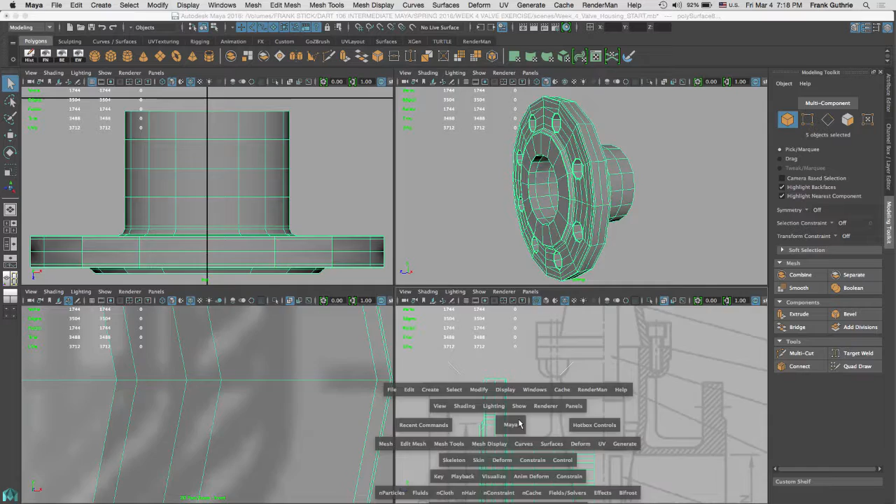Alright, so we have the flange finished. So what I'm going to do next, I'm going to build the housing. If I go to my side view right here, let me get out of X-ray mode. And here's our housing. This is the shape of the housing. Housing is a very interesting shape. It has a rectangular cube on the top, as you can see right here.

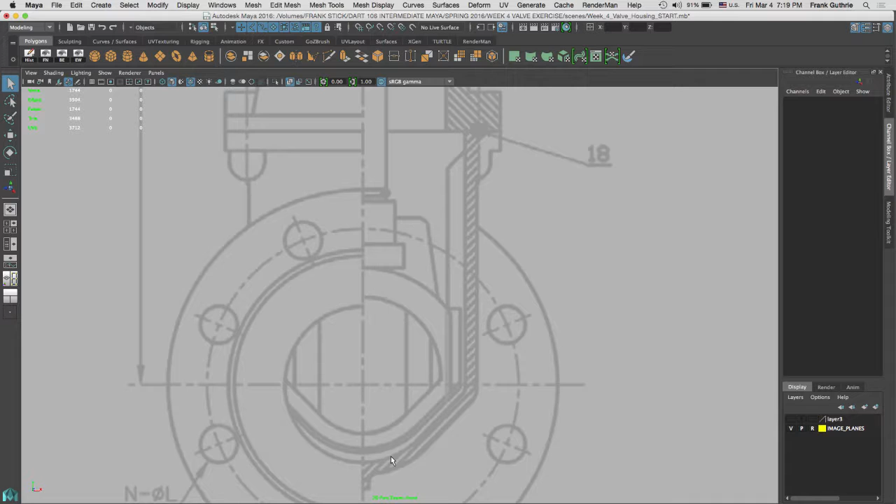But as we go down to the axis of our flange, notice that in the front view it looks like a rectangle, but here we're going to have a double taper. It's going to be a rectangle sideways, but then when we get to this point right here, it's going to taper. So the best way to attack this shape right here is I'm going to create a cube.

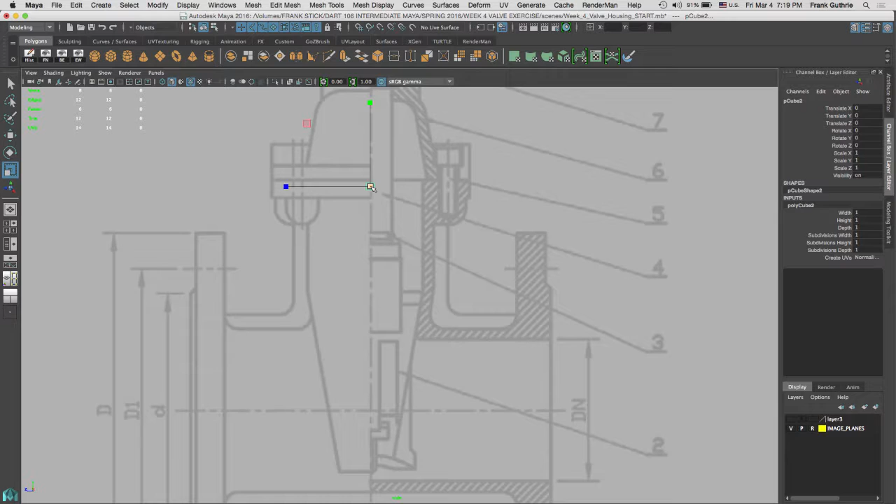I'm going to hit R for scale, and I'm going to scale it so it matches the width on the side view. I'm going to lower my box down to this point right here. That's where it starts tapering towards the bottom. I don't care about the top because I'm going to cut it. And I'm going to go to my front view. I'm going to select the bottom face. Even though these guys are selected, I'm going to hold the control key and deselect the top.

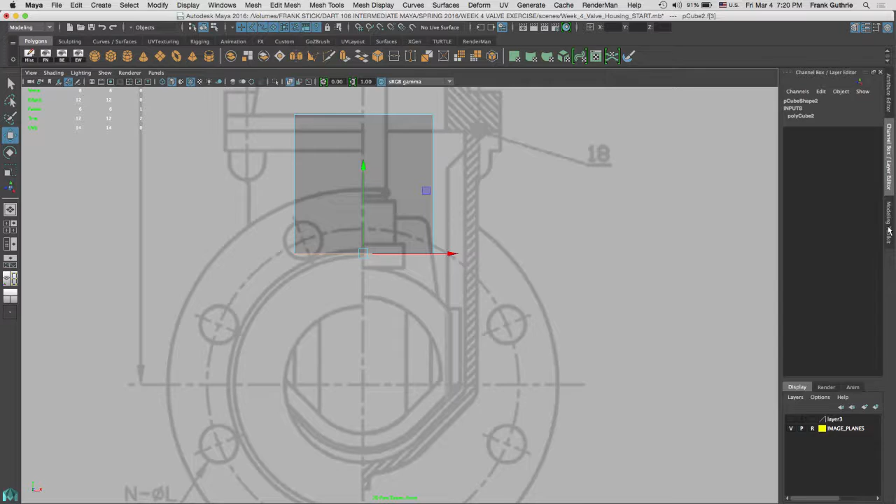And I'm going to use my modeling toolkit. I'm going to go to extrude. And I'm going to move this guy down here. I'm not worried about the width yet. I'm going to change the width later. I just want to get the height from the side view, as you can see right here.

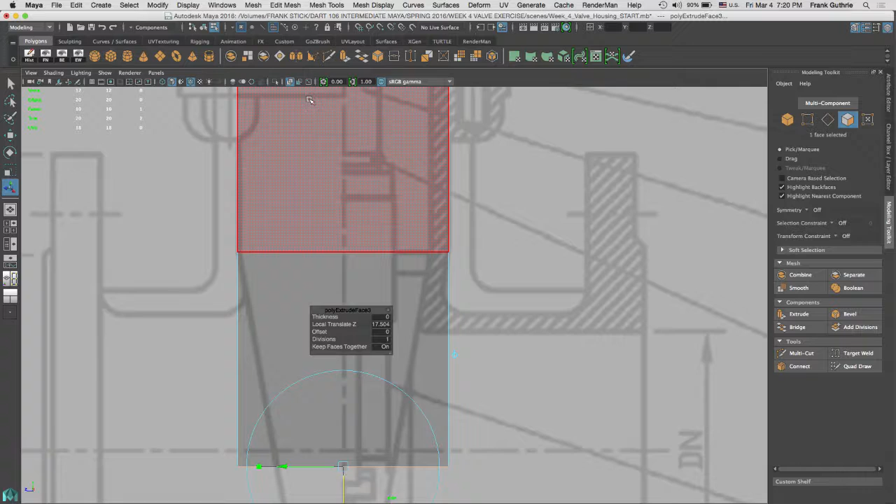Let me go to X-ray, which is this button right here, to the right of the isolate selected. And I'm going to do that one more time so I can get the bottom of the casing. So I'm going to hit G to repeat last operation, and I'm going to drop it right here. Okay, now I can select my scale. I can go to the front view, and I'm going to hit R for scale and expand it.

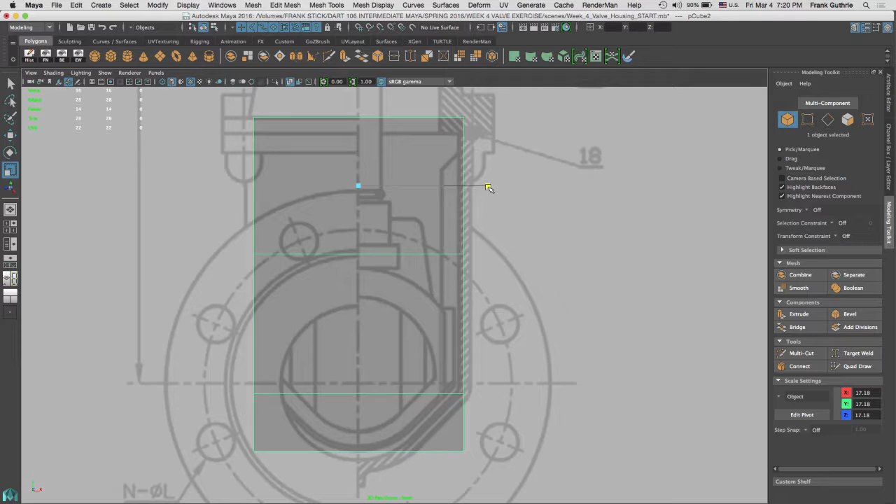So notice that we're going to get this part here to taper and to meet our flange, right? So I can do that right now. I can select the vertices of this box and scale them until it meets the shaft. All right, let me go to my 3/4 view, and look at that. It's right there. I'm going to take advantage of this edge right here. Okay.

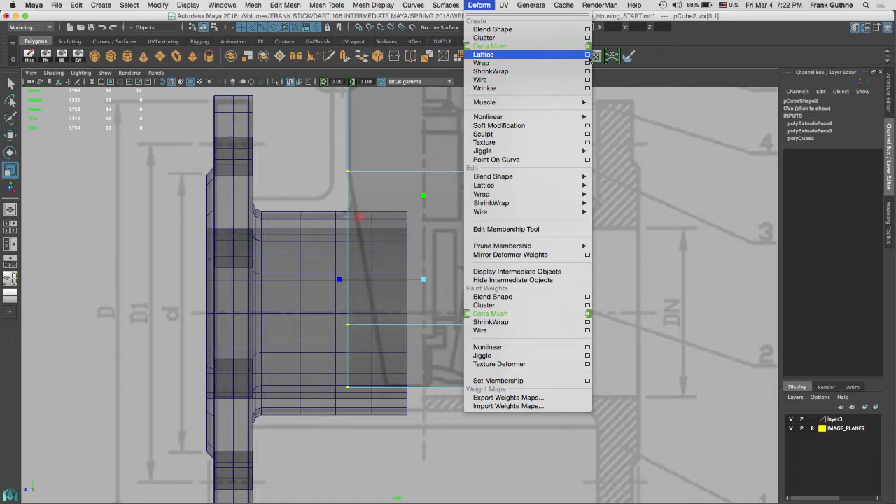So I'm going to fix the side taper. And to do this, I'm going to use a lattice. The lattice will be under Deform, Lattice. I'm going to reset it, make sure that everything is set to 2. I'm going to hit create. And I'm going to deform the vertices that I had selected. So now what I need to do, I need to go to component mode, and selecting the component mode of a lattice is kind of tricky.

All right. So the best thing to do is to go to the 3/4 view. Okay. So I'm going to select the bottom 4, these guys right here. And on my side panel, I'm going to taper both sections right here. So this one and this one. So again, it looks like a rectangle all the way down to the middle of our shaft. But if I go to the side, notice that it tapers all the way to the bottom.

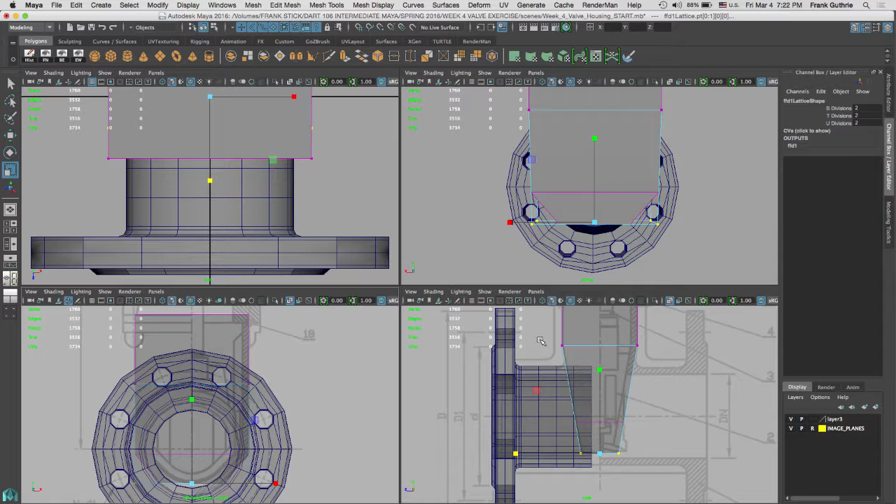So to get rid of the lattice, I'm going to go right mouse button, select my object, and I'm going to delete the history. That's how you get rid of the lattice. And let me delete half of this. In object mode, I'm going to use the multicut tool. And I really don't care to hit the middle 100%. Again, that is because I'm gonna snap it.

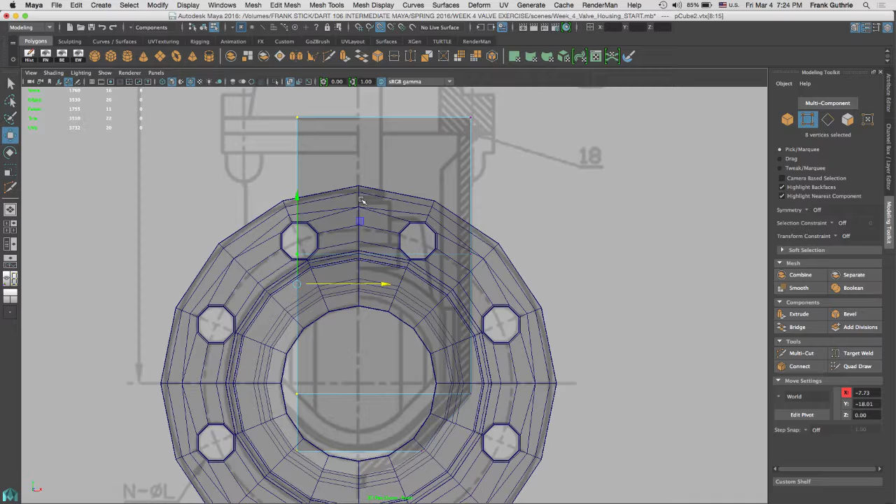So I'm gonna select these vertices right here, move tool, I'm gonna drag it, and then I'm gonna hold V for point, and then I'm gonna middle mouse drag to a place that I know there is a point. It doesn't have to be from the same geometry. It can be any other geometry. So I'm gonna use the flange. So I'm gonna go V, middle mouse drag, right there. Okay, so I have half of my piece. Let me go to object mode.

Now, let me fix this edge right here so that it matches this edge right here, right? We're going to take advantage of that. So I'm going to select this face. I'm going to move it up, and I'm going to do the snap to point trick. Hold V, and then middle drag it to this point. And now I'm going to select this edge like this, and I'm going to move it in the X axis, and then I'm going to hold V and snap it to this point right here.

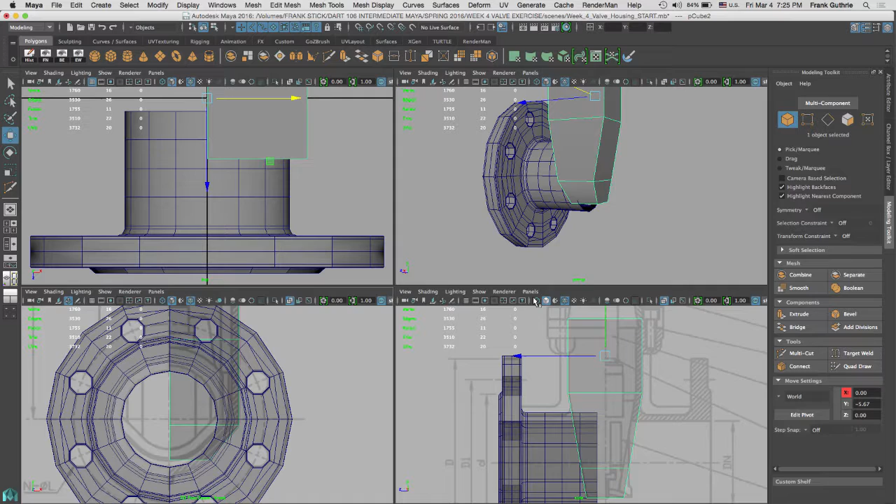All right, so now these two edges are in the same place. I'm gonna go to object mode, right mouse button, select my shape. I'm gonna double check, make sure that it fits my image planes. These look really good. And this half looks really good and matches the drawing. Notice that it goes right here and it's gonna melt with the shaft.

So again, select all the edges, and we're gonna go to bevel, and let's control our bevel thickness by moving our fraction. So I'm gonna make a smaller fraction like this. I don't wanna get too complicated, especially in this corner right here, because I'm gonna have to merge these edges, and I'm gonna give it a couple of segments, 1 and 2, okay? And I'm gonna make my fraction a little bit bigger, like so.

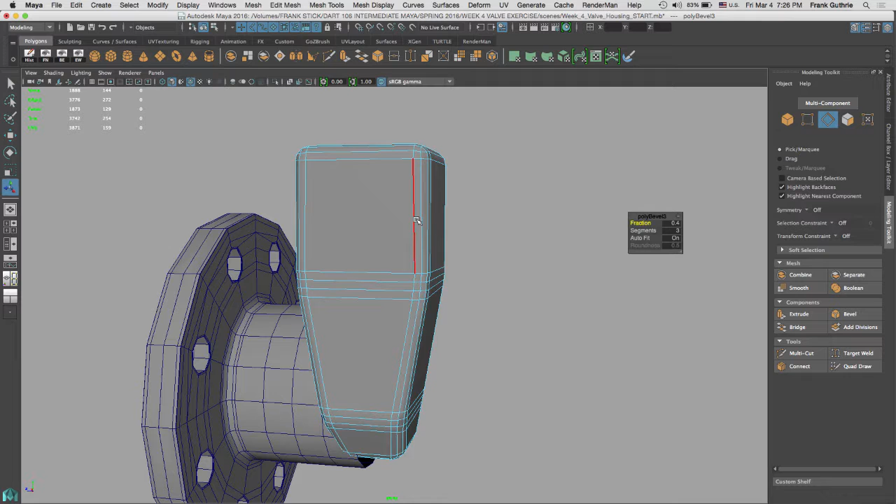All right, I'm not gonna delete the history, so I'm gonna go to object mode. I'm gonna get rid of my wireframe on shaded, and I'm gonna see if I like this bevel or not. I'm gonna look at my reference to see if this bevel is close to our reference images. Let me select these edges right here. And when you select these edges, we can soften our edges. You will notice that some of these edges are sharp, like for example right here, versus these edges right here.

So all you gotta do is select the edges, and we're gonna go shift, right mouse button, and we're gonna go to soften, harden edges, and I'm gonna select soften edges, and there you have it. Look at the difference right here. Now all our edges are softened.

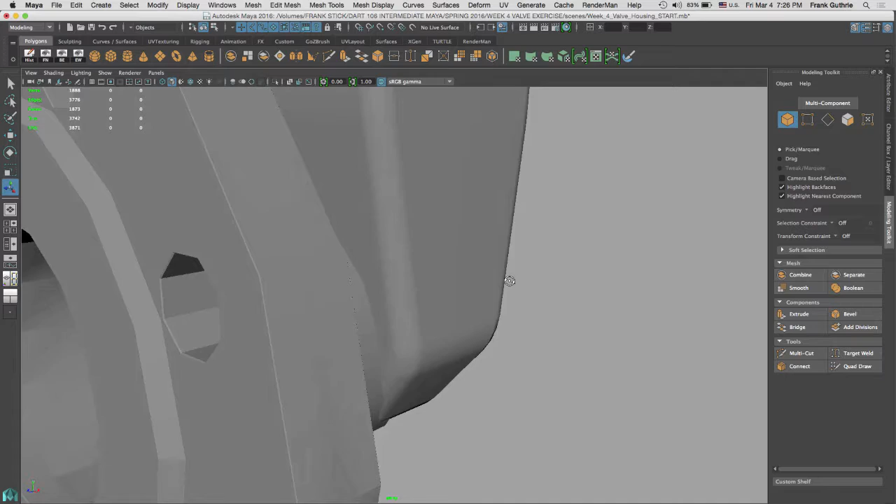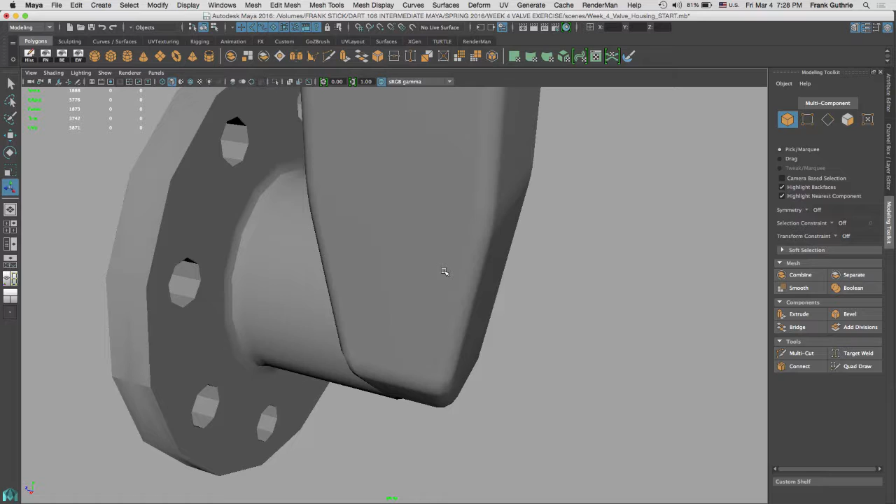Now I've noticed in my reference, here is our reference. I'm gonna zoom in and I'm gonna look at the bevel that I have right here, and I'm gonna compare it to the one that I have in Maya. All right, I'm gonna try to pose this valve and compare it to the one that I have. And that looks pretty decent. I think I got the right bevel width. Perfect.

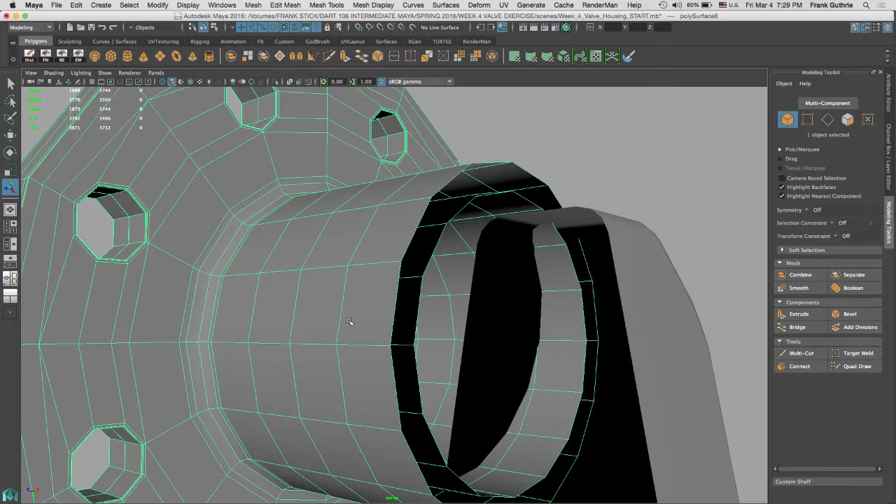All right, so what we need to do now is we need to combine these two shapes. And as you notice right here, I have all sorts of geometry and all sorts of edges going everywhere. Now, the rule is that we do not want to alter these planes. I want to keep these planes the way they are, because when I hit 3, I'm going to get a smoothness that is going to propagate to this flange right here. Now, look what happens if we add edges in this direction, going along with these edges right here.

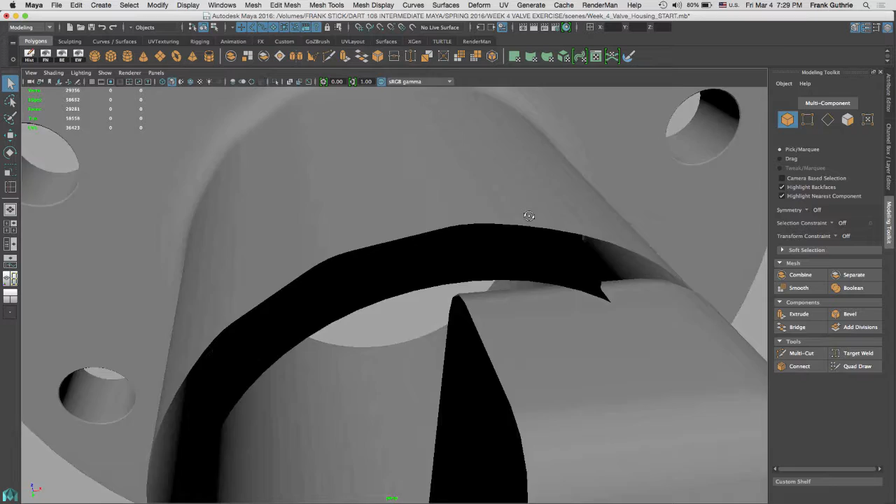If I select this, for example, and I go shift, right mouse button, insert edge loop tool, and I start putting a bunch of edges right here. When I hit 3 for smooth preview, notice that our planes will flatten. And that is because we are actually creating a fencing, just like what we did for the edges. So we don't want to put extra edges going in this direction. However, we can put as many edges as we want going in this direction right here.

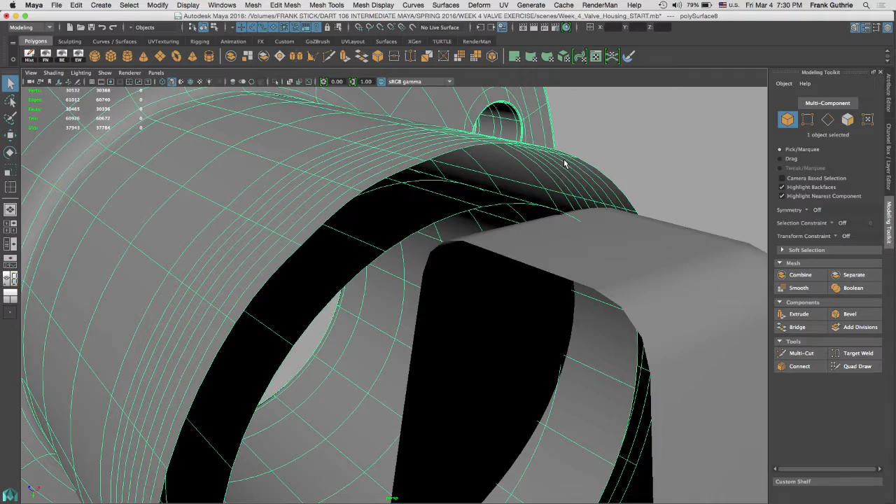Let me undo a couple of times. And let me apply the insert edge loop tool to this direction, and you will notice that nothing will happen. We will not get any flattening whatsoever. Okay, so I overdid it. I put a bunch of edges just to prove my point, and I'm going to hit 3. I think this edge right here is extra. I'm not sure. Yeah, because this doesn't look right at all.

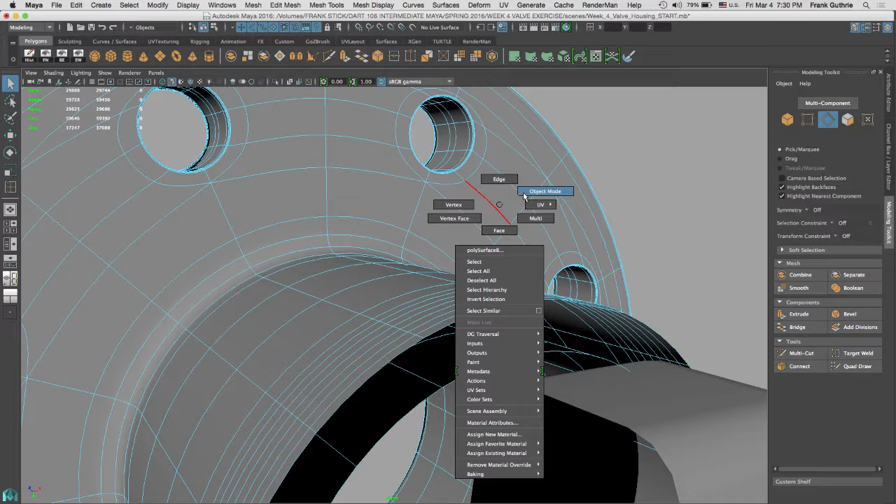With the Q, which is the selection tool, I'm going to double click this edge, shift right mouse button, delete edges. Do not hit delete, because you will leave a bunch of little orphan vertices. So notice when I hit 3 that the shaft is perfectly smooth. However, we have a bunch of edges right here, and they do not alter the smoothness of our planes. They will do it going in this direction, but not in this direction.

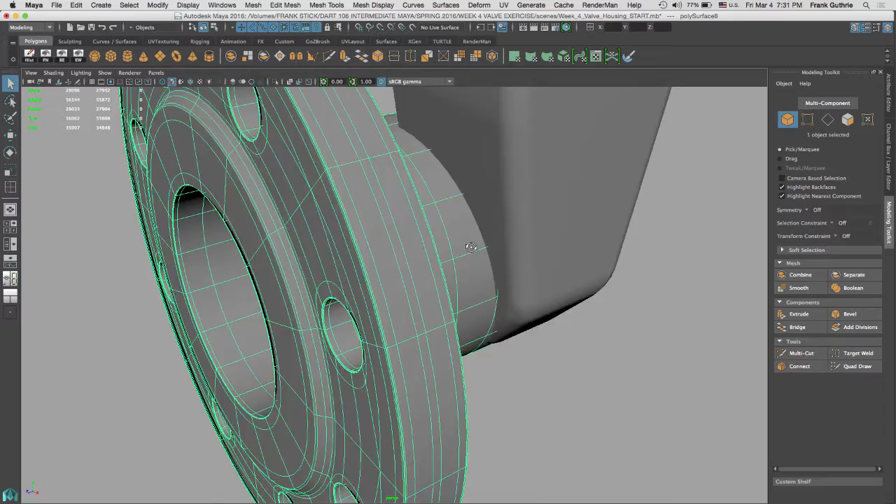And let's talk about combining these two pieces. So the plan of attack is as follows. I'm going to turn on my wireframe on shaded. Now this is fine. I can extend an edge right here. I can also extend an edge going in this direction, and I can extend an edge going in this direction. These guys right here are going to be what I weld.

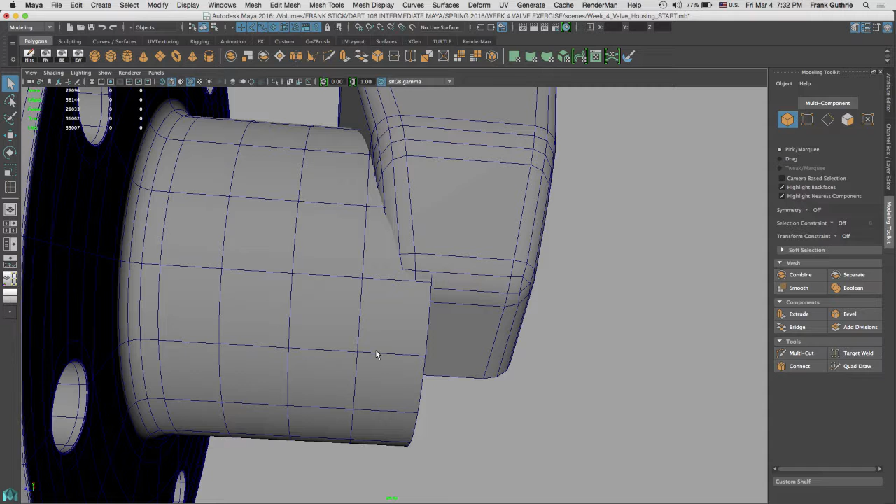And I'm going to cut this in half because we don't need to work on this half. Remember, we're going to work on a quarter. And what I can do is I can continue these edges all the way down this way right here. Okay, let's do this. I'm going to select this object, and a really fast way of cutting this object in half is pretty much just going to your side view. I'm going to select these faces, delete them. I don't need these.

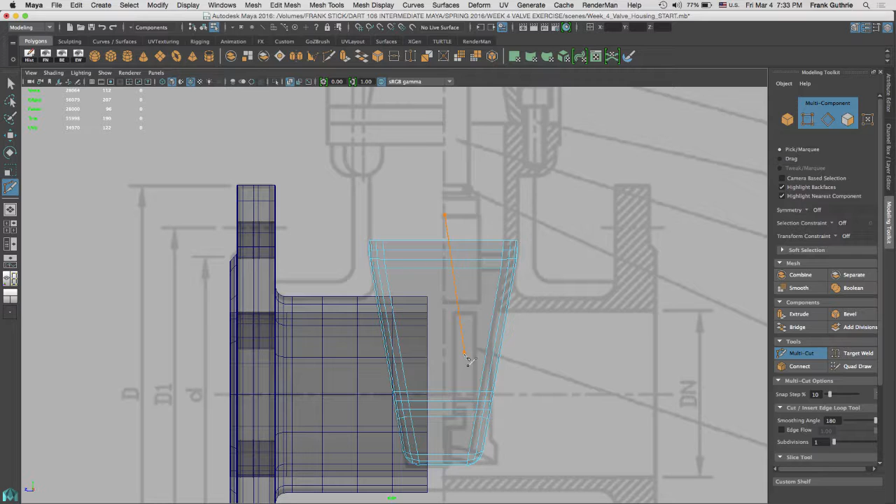And I'm gonna select this object, select my multi-cut tool, and then click outside of the object, hold shift so you can get a straight line, and then drag it past the object, and it will do a clean cut. I'm gonna select these faces, delete. Excellent. All right, so let's start combining these two pieces.

The very first thing that I'm gonna do is I'm gonna get rid of these edge loops on the flange. I'm gonna double click on this edge, and I'm gonna go shift right mouse button, delete edges. Let me go to 1, double click on this edge right here, hit G. G stands for repeat last operation, and the last operation was delete edges. So double click here, G, double click in the inside of the shaft, G, double click here, G, and double click here, G.

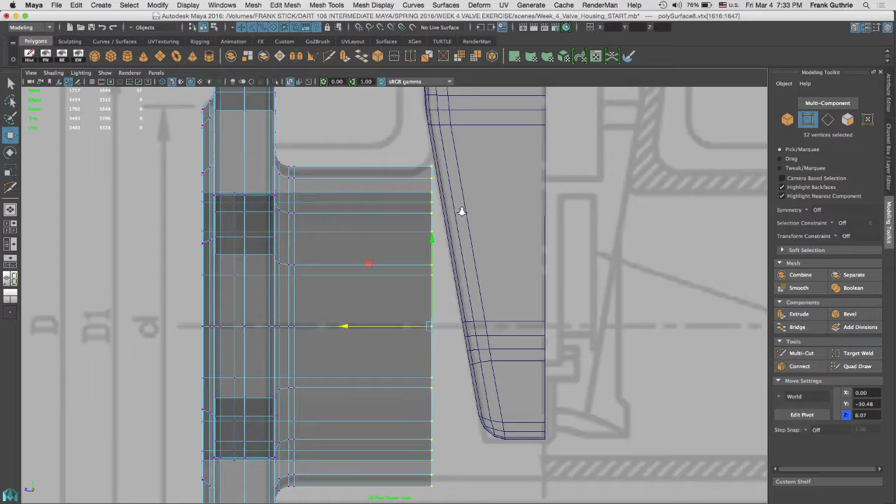Okay, so we wanna move these vertices right here to the point that they lay right flat on this face of our housing unit. So the best thing to do this will be to use, again, our lattice. I'm going to correct this edge right here. I'm not really thrilled with this edge. Now, I cannot use my vertex snap with the V key to this right here because it's going to alter my volume. However, I can use our friend the multi-cut tool, and I can clean these edges right here. So I can do this, and then do another one right here, and then do another one right here. I'm putting it next to the other ones because the other ones are all crooked, all right? And I'd rather have these very straight.

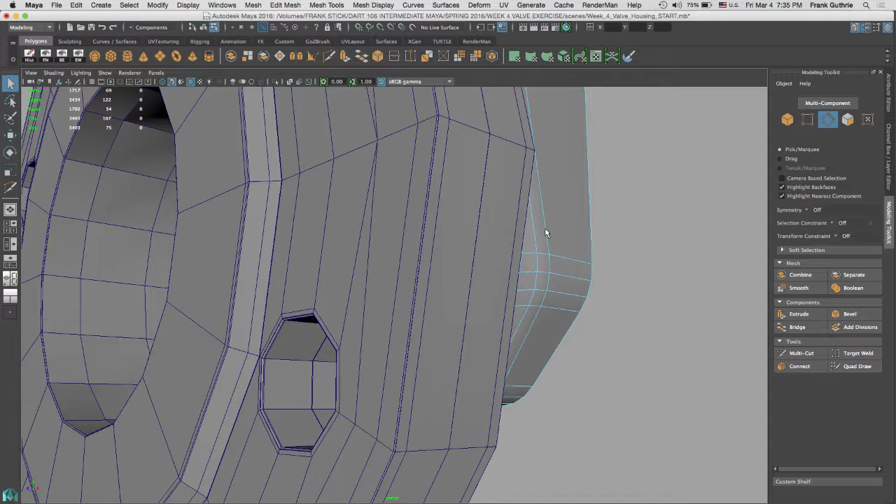So hit Q, double click on this edge right here. All right. Shift, double click this one. Shift, double click this one, shift, double click this one, and then shift, right mouse button, delete edges. And notice that we have not altered this corner, okay? However, these lines are straight. Let me go and hide the flange real quick. I just want to see these vertices right here, either giving me a problem or not.

Now, notice that I'm not getting a really nice curve on my bevel. That is because it was a very odd shape to bevel, right? So I'm going to eyeball this. I'm going to move these vertices right here so I can follow this curve. Okay. And let me select these guys and move them in. Okay, there's an issue right here. I have a triangle, but this doesn't matter because this piece is going to be deleted. All these faces right here are going to be deleted because our shaft is going to connect right here.

Okay, so I'm going to go to the front, and this edge right here will meet this edge of the flange. So I can select these faces, delete them. I'm going to select all of these guys right here, delete them. And I'm going to move this edge so that it matches this corner. Now, one way that we can do this is that we can select vertices. And what I'm going to do is I'm going to put the pivot point for all these vertices right on this one right here. So I'm going to hit D, V, middle mouse button, drag it, and then hit D again. And I'm using the move tool, so I want to make sure that the spacing is kept.

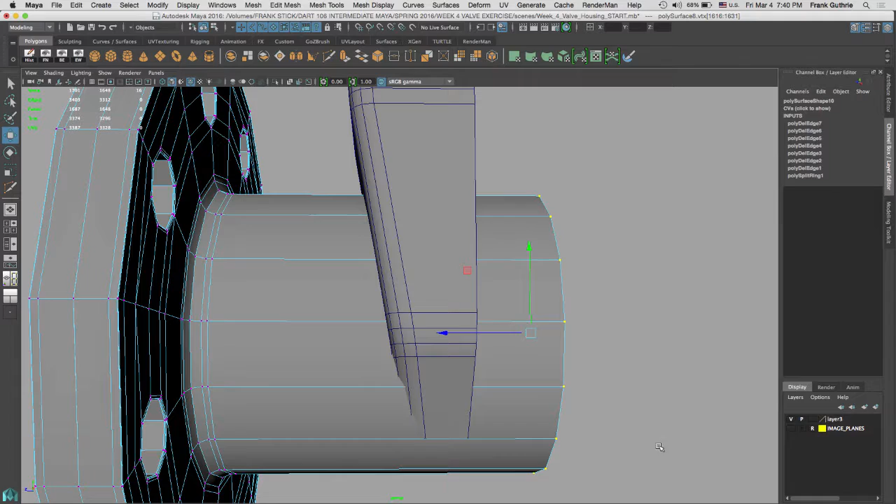Okay, so the way that I'm going to do this, I'm going to select my vertices, and I'm going to use the lattice again. So I'm going to click on the lattice. All right, so now I'm going to go to right mouse button, lattice points, and I'm going to move this guy right here. I'm going to go to my side view, hit F to find those points, and I'm going to zoom in as much as I can.

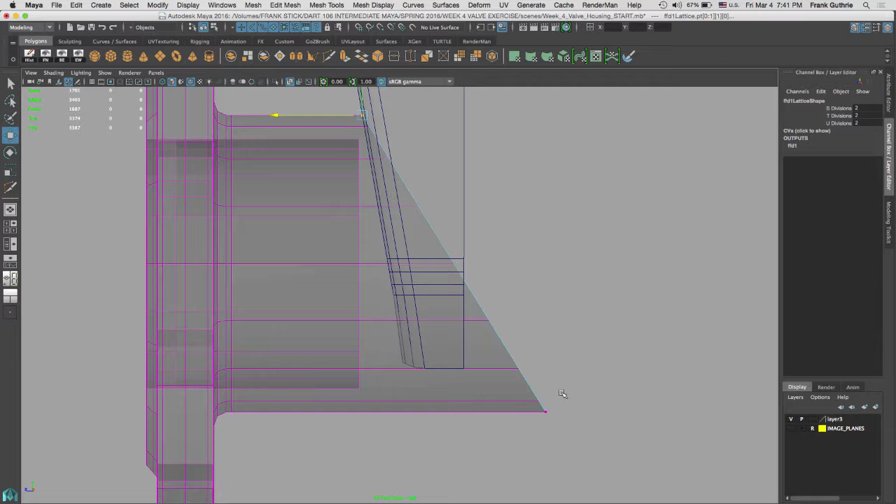Again, all the way down to a subatomic level. Right there. I'm going to hit F again. Now, there's a really cool trick in Maya. As soon as I move this right here, okay, if I want to align it to, let's say, this point right here, what I'm going to do is make a movement in the direction that I want this to move. So in this case, it's going to be on the Z axis. And then I'm going to zoom in as much as I can to this edge.

And with my middle mouse button, I don't have to grab the handle anymore, because the middle mouse button is going to allow me to repeat the last transformation. So this works really good with the scale tool and the move tool and the rotate tool. So again, you make one movement, right? And then you can be anywhere around here. Move your camera, zoom in, and then use the middle mouse button to repeat this operation, right? I can go right here, middle mouse button, undo. Perfect. Okay, so I have this aligned correctly.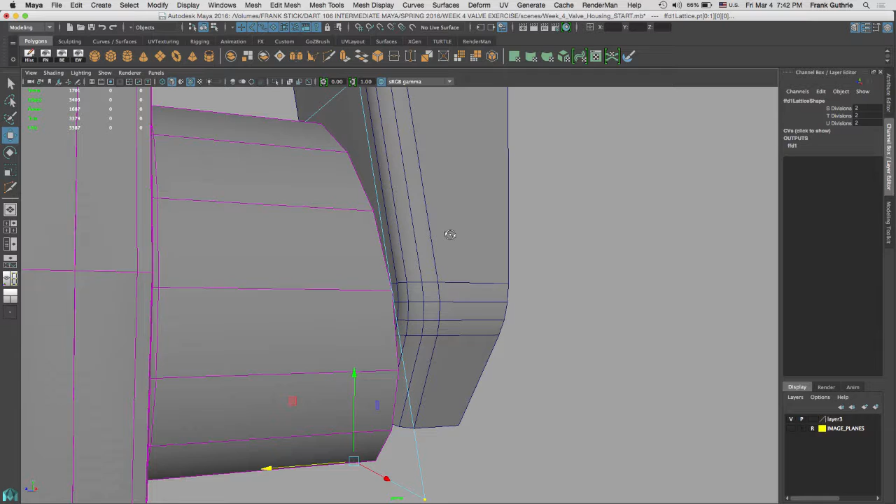I'm also noticing that this piece right here has expanded. All right, that is due to the beveling operation. So again, let's get rid of this lattice by selecting this object and deleting the history. And I'm going to do the same thing with these vertices right here. I'm going to select this object, vertex, select these guys, go to deform lattice, and now I'm going to go right mouse button, lattice point.

And what I want to do is move the bottom ones like so, but only this group right here, only this side. So I'm going to do a movement. I'm going to zoom in as much as I can, and then I'm going to use my middle mouse button right there. Perfect. Okay, select this object, delete history, and as you can see, let me go to the 3/4 view so you can see it. Our lattice will disappear.

Okay, and what I'm going to do next is create an extrusion out of this edge on the flange. Out of this edge, I'm going to extrude this edge in such a way that it goes along with this plane right here, and we're going to use the scale tool trick, and then I'm going to combine that edge with this piece right here, so I can use this edge again to create a bevel. Okay, so if we go back to Photoshop and look at our references, pretty much what we're doing, we're creating this connection right here. Notice that this box will merge right here, but here we have a bevel. Okay, so let's do that real quick.

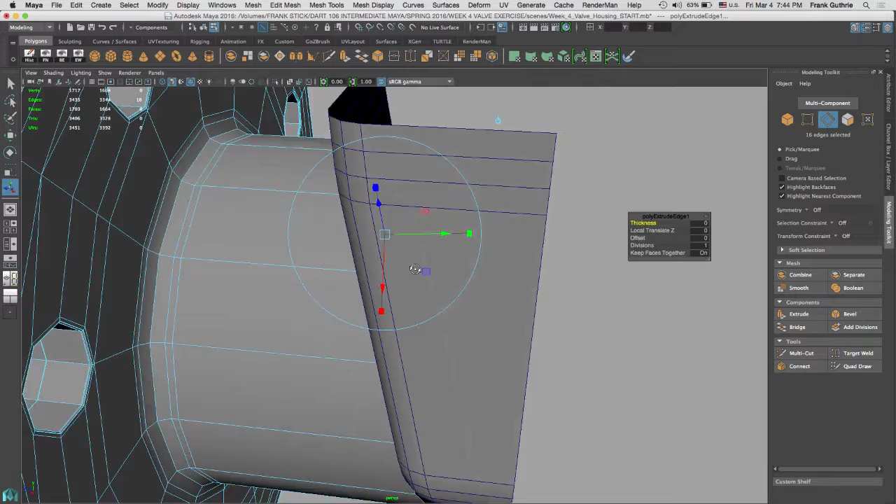I'm going to select this edge, and I'm going to go shift right mouse button, extrude edges, or I can use my modeling toolkit and do an extrusion. So if I was to use the default local translate Z, remember every time you make an extrusion, Maya uses the Z movement, okay? And it doesn't have to be in the Z axis, but your gizmo will have an X, Y, and Z transform, and you will see it right here in the polyExtrude gizmo. So if I go translate Z, notice that my extrusion is not going along this plane.

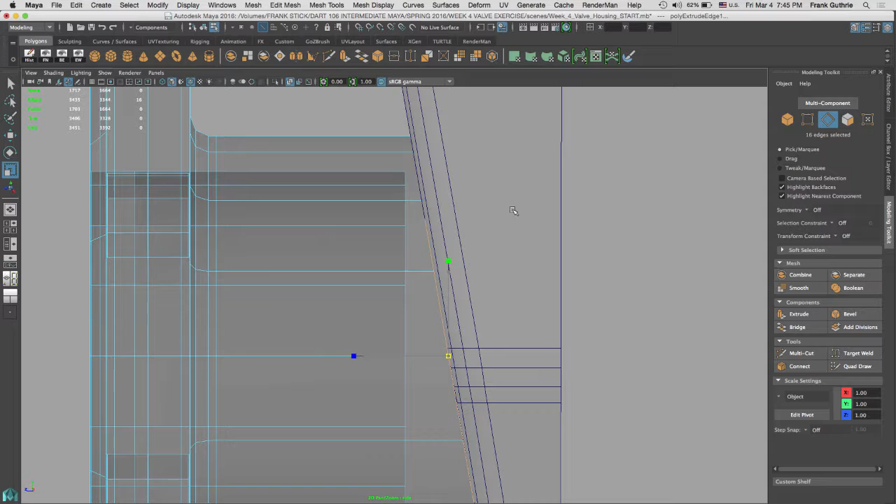What we have to do for that, undo, and we know that we just made an extrusion, so there is an edge loop on top of an edge loop. I'm going to hit R for the scale tool, and I'm going to do a global scale from the middle. Okay, and when I do that, notice that our edge is going along with that plane. If I go to my side, you can see that. And again, I just made that transformation, so I'm going to keep doing it with my middle mouse button. And as you can see, that edge is riding on this face. This is exactly what we wanted.

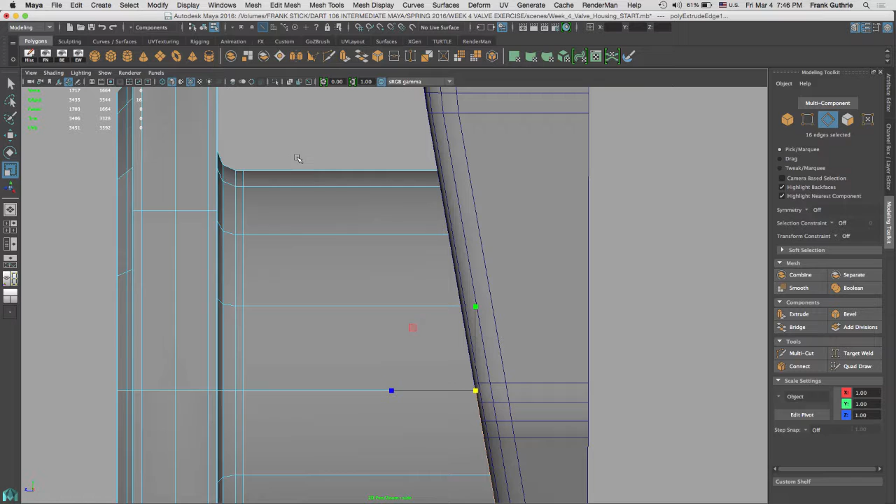Now, the next thing that we need to do is support these edges just like what we have right here. So for that, let me get out of X-ray mode so this is more obvious. We are going to use our insert edge loop tool.

So I'm going to right mouse button edge, select one of my edges with the selection tool. Then I'll go shift right mouse button, insert edge loop tool, and go to the options. Here are the options, because I want to reset this tool, and we're going to select multiple edge loops.

When I select multiple edge loops, as long as you have use equal multiplier on, the tool is going to insert edge loops and space them depending on the number of edge loops selected. So if I have 2 and click right here, notice I cannot go left and right like we can under relative distance from edge, but it gives us evenly spaced edge loops, and that's exactly what we want.

I want evenly spaced edge loops, but instead of 2, let me undo, and type in 3, hit enter, and this is what you get. The reason I picked 3 is because I know I'm going to get a middle edge loop. Once we build the edge for the right hand side so it matches the same distance as this, we reinforce it, and I'm going to get rid of this edge loop here and here.

So let me show you the standard way of using the edge loop tool, which is this one right here, relative distance. This allows us to create an edge loop and move it left and right like this. Let me move this one a little bit closer. It takes into consideration the distance of these edges based on the sliding procedure, or based on the multiple edge loops with the use equal multiplier.

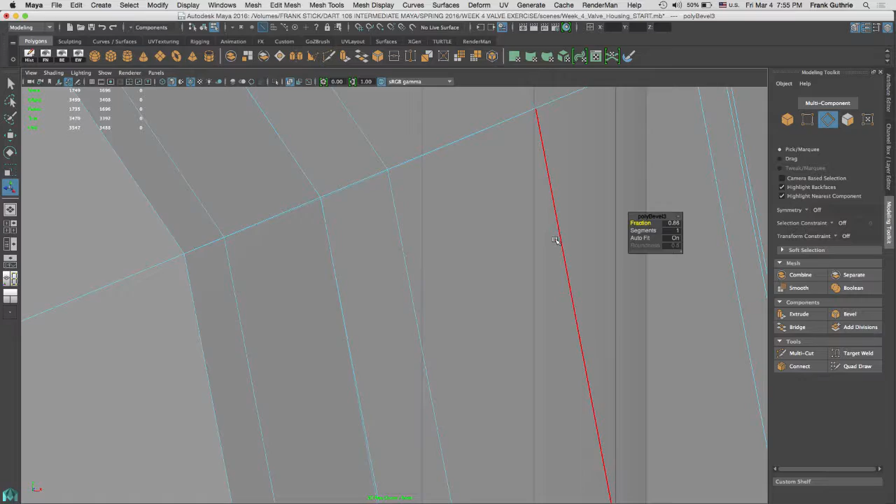So I'm not going to delete the history, I'm going to stay here, and we need another segment, so I'll increase my segments to 2. Boom, there you have it. Now this bevel here and this bevel here match, and I'm not too worried about this because I am going to blend these 2 guys together.

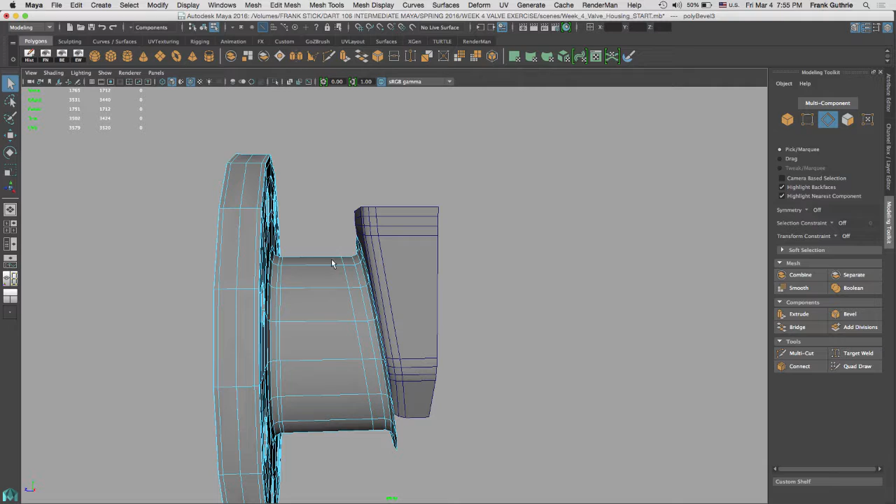And I'm going to start by now hitting Q, cutting this piece from the flange, and I'm going to hide the flange so we can work in this direction without having the flange impeding our visibility.

First, let me double click on this edge and move it to this side right here. We want to make sure that the distance is the same as on the opposite side.

Now I'm going to select with Q one of my edges, shift right mouse button, and build some support. Insert edge loop tool, options, use equal multiplier, multiple edge loops, type 3, close this, and just click once. Perfect.

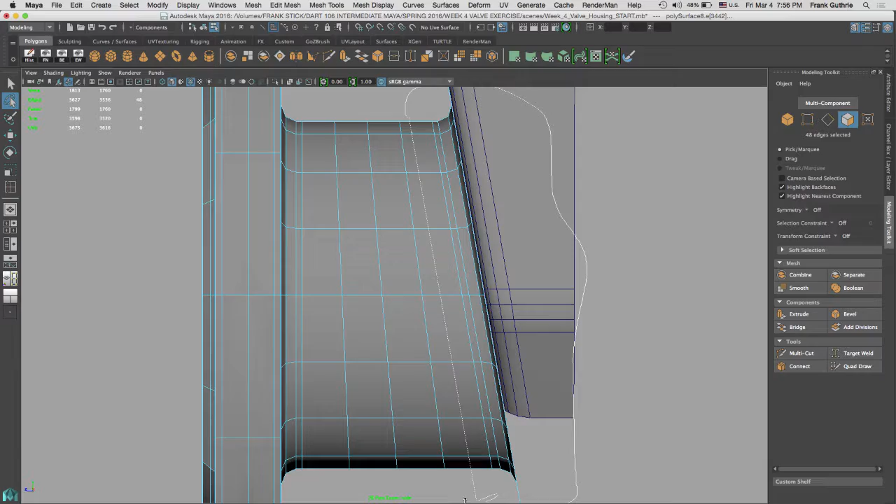I'm going to cut everything from here using the lasso. I'm going to go to my faces and select all these faces right here. Let me double check in my 3/4 view perspective camera.

Now we're going to go to Edit Mesh, Extract, and Maya is going to create 2 pieces of geometry. I'll right mouse button, select both pieces right here, and delete my history.

If I go to my outliner, notice that this is part of this group right here, and because I have it on the layer, if I close the layer to hide the front of the flange, it's going to also hide the newly created part. So what we need to do is go to the outliner, hit F, find the newly created piece, which is this one, middle mouse drag it out, and now notice what happens when I close the visibility of this layer. Fantastic.

All right, so let's delete half of this. We don't need to work with this half, and let's start combining these 2 pieces together.

Number one, I'm going to go to my front view right here. Actually, let me close — there we go. Right mouse button, edge, shift right mouse button, insert edge loop tool, options, and let's reset this tool. Perfect. I'm going to manually insert an edge loop right there.

I notice that I'm going to have a quad once I delete this part right here. And we want another one that goes from here to the top, so I'm going to click on this edge right there, and that will make a quad out of this. Once I cut this guy, I will have a quad right here.

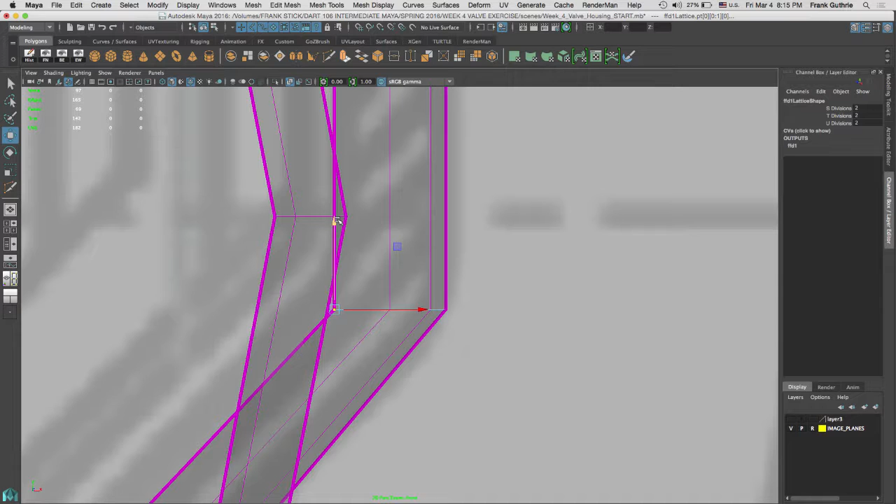What I'm going to do is select these guys right here and use the move tool. This way I won't lose my edges, because before when I was rotating it, notice that the edge was shrinking, right? So let's do it again.

Let's move this up right here, and I'm just going to eyeball it. You cannot see that on the screen, but I'm using a piece of paper on top of my computer screen, and I'm going from this point right here, putting the other part of the paper right here so I can create a visual line.

And then I can move this guy down, right there, perfect. So again, select the object, delete the history, and there goes the lattice.

Now all I have to do is select this vertex right here, move it up, hold V, snap it to that point, move it now in this direction, hold V, perfect. I'm going to leave this guy the way it is. I know I have a triangle right here, it's not a big deal. I'm going to modify this edge.

Let's take a look at what we have right here. Fantastic. Now something happened right here. I'm going to go to my side view and see what's going on. And as you can see, these edges got shrunken in.

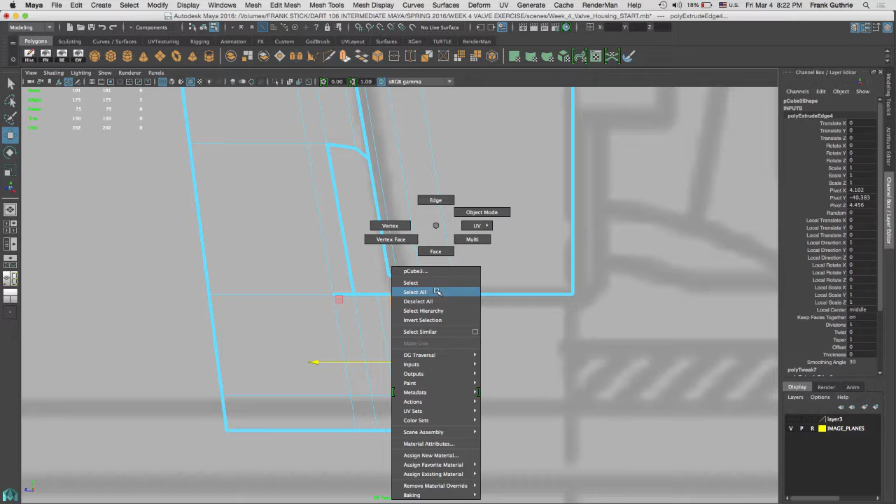However, I'm going to select these vertices right here, these guys right here, because these guys have to be straight with this line right here. This is where this piece is beginning to blend in.

So I'm going to do a W, left mouse button, deselect, keep spacing. When I move this in this direction and hold V and middle mouse button right here, now they're aligned in the X axis.

So now I have to align it in the Y axis. Move, V, middle mouse button, and there you have it.

Now remember I did this extrusion right here, this edge. So I'm going to select this edge, shift select this edge, W, keep the spacing, move it out of the way so I can select this vertex right here as my new pivot point.

So D, V, middle mouse button right here, D. Now move it and snap it to this point.

Excellent, so I'll be able to select these two guys, weld them, fill this hole by extruding edges and connecting them together, and then scaling everything.

All right, so we can follow that edge right there, this edge right here. Okay, so let's do that.

Let me select this edge right here, and let's do the modeling toolkit, extrude, W. Just quick and dirty.

Now I'm going to use a new tool, called the target weld. The way the target weld works is you select one of your points. Let me get rid of the bevel. Make sure that you select vertices, and you're going to go from here to here.

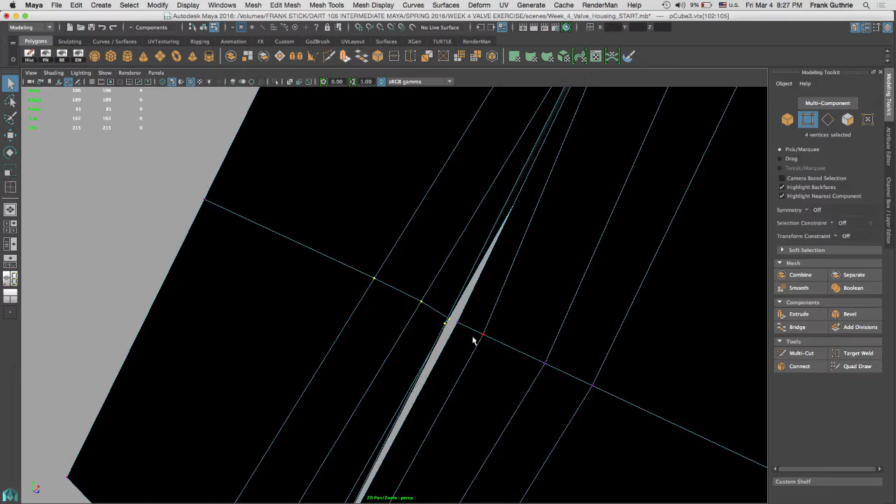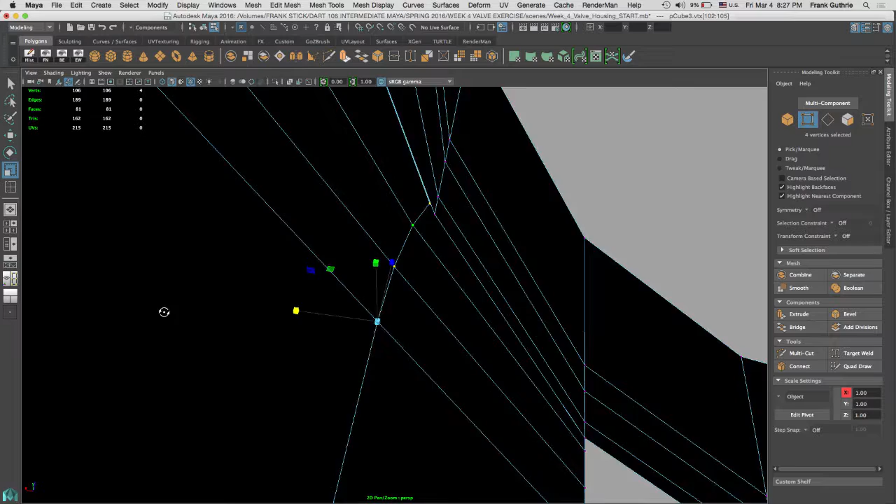So now what I'm gonna do is the same scaling from the front view that I was doing before, but from this pivot point right here, because this is flat. So R, D, V, middle mouse button, back to D. And here we're gonna do a combination. We're gonna go on the X, and then we're gonna go on the Y until these 2 points right here meet. Okay? I'm gonna go to my front view, right here.

And okay, I'm gonna go like this, and then I'm gonna drop it down right there. Okay, and I can tell that these guys right here, not the guys that I have selected because I aligned those with my lattice, these guys right here are not correct. So I'm gonna select these guys, and I'm gonna do the same trick.

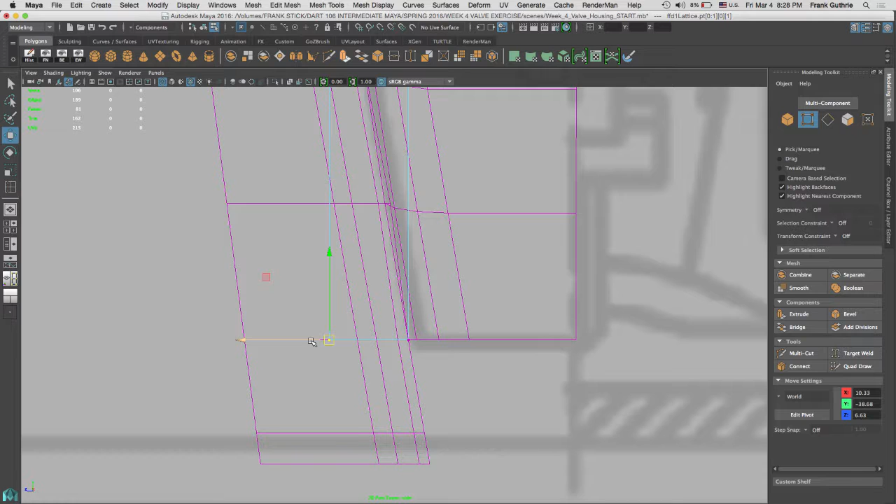Select this guy right here, shift select this guy right here, select the end, and then select this, and I'm gonna go to my lattice, right mouse button, lattice point, move tool, snap it there, and then go to the top, snap it in the opposite direction. Aha, I solved the problem.

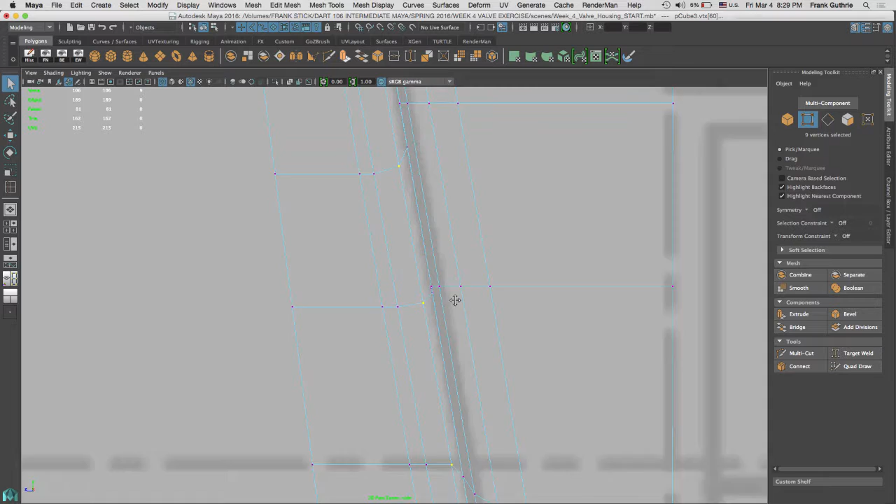Okay, however, I'm noticing that this edge right here is not right. No big deal. Select the object, delete the history, and I'm gonna tweak my vertices by selecting my edge first. Let's see how far down it goes. Okay, and then I'm gonna select this edge and this edge and this edge. So I'm going to convert this into vertices, and I'm gonna align it from this vertex right here up to the vertex on the top.

Okay, lattice, deform lattice, right mouse button, lattice point, move this guy right here. And I'm gonna do the same thing at the bottom. Move this guy right here. And look at that. I've corrected this edge. Okay, now I'm going to correct this other side again. So let me delete my history.

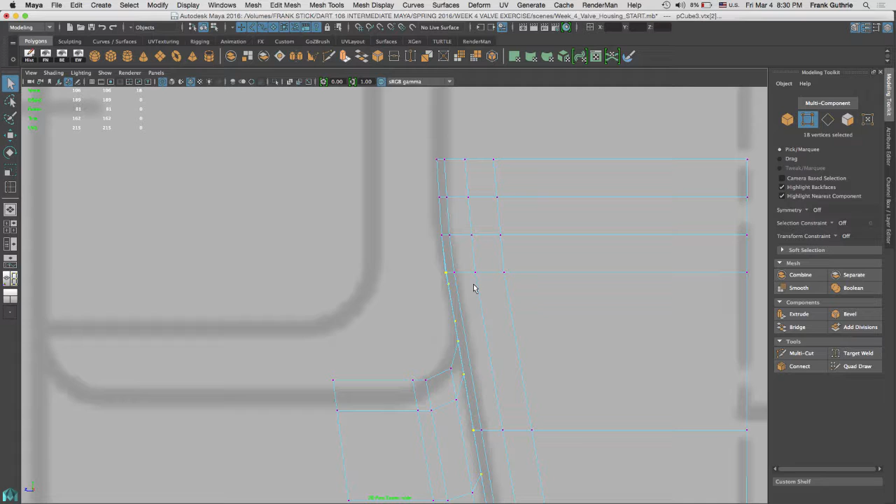So vertex, and I'm gonna select this guy right here, Q, and I'm gonna go all the way to the top just to be sure. This guy, this guy, this guy, and these guys right here. Remember, we want to snap everything to, let's see, we'll do this guy right here.

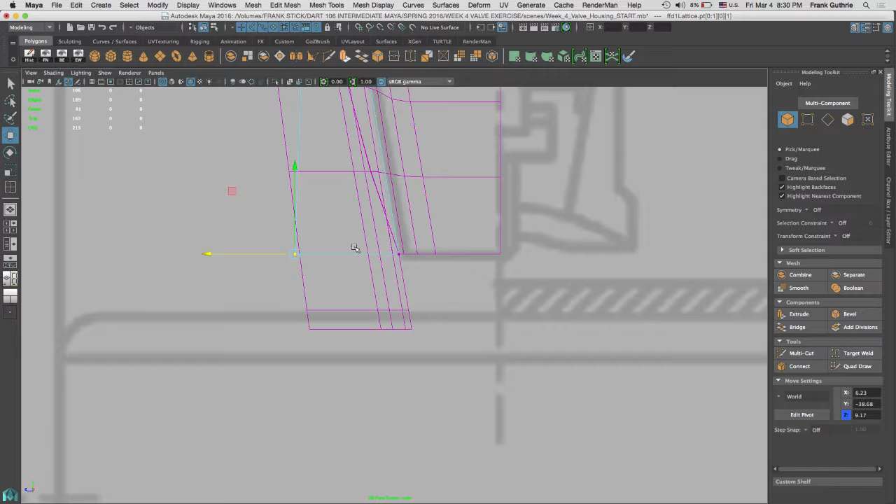Okay, so deform lattice point, select this lattice point and move, hold the V key and go to the farthest vertex, and now we're going to do that at the bottom in the opposite direction, and V right here. And notice how now our edges are perfectly aligned. Okay, and I'm going to go to my delete history.

I'm going to bring my border edges. I'm going to see what's open. Okay, so let's start welding vertices. I'm going to select these vertices right here. Shift, right mouse button, merge vertices to center.

Select these guys. Select these guys, these guys, these guys. And I believe we are almost done. All I have to do now is extrude these guys right here. Okay, so it's going to be a combination of selecting these edges, shift right mouse button, extrude edge, and I'm going to do one at a time.

Okay, making sure that I snap my pivot point to this edge right here, D, V, okay, to this vertex, hit D again, and with this keep spacing on, I'm going to drag on the left hand side and do that, hit G so I can extrude again, W, okay, move the pivot point right here. Now make a small movement, V, middle mouse button, let's do this 2 more times, W,

okay, D, V, so we snap it to that point right there, D to re-engage the pivot point, move it, V, middle mouse button, and we're going to do the last extrusion, right? But this time I'm going to deselect my keep spacing, because what I want to do is I want to move it, V, and when I snap it to this point the edge is going to straighten like so.

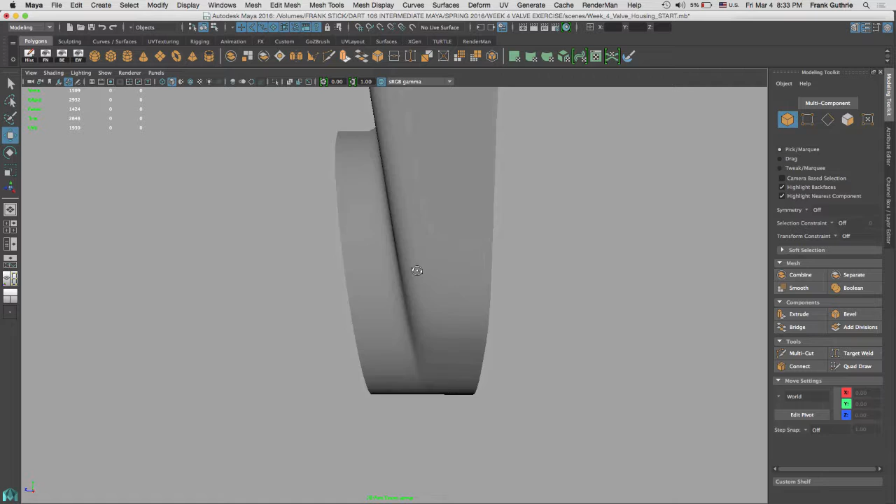Okay, the last thing that we're going to have to do is put a bevel right here, because if I hit 3, okay, go to right here, let me get rid of my wireframe on the shaded, and there you have it. We've attached 2 odd shapes, right? We kept the curvature of our shaft, okay? And now all we have to do is we have to create a bevel right here.

So what I can do is I can go to 1, select this edge from here, shift, double click right here, okay, and we're gonna add a bevel. And I know we're gonna get some weird shapes, so what I'm gonna do is I'm gonna add a 3rd edge in the middle. Okay, I'm gonna make the bevel a little bit bigger. I'm not worried about this at all. The only thing that worries me is that these vertices are going left and right, but I will fix that with my lattice trick.

Okay, so let's hit 3. Let me go to object mode, and look at that. We have a sharp edge that resembles our reference right here. See the sharp edge versus the rounded edge? Fantastic. Let's go back to Maya. Okay, let's fix that corner, and then let's align those vertices.

So I'm gonna hit 1. What I want is to combine all of these guys right here to this vertex. Okay, right mouse button, vertex, select all the vertices, make sure that we don't have keep spacing on, and drag this, V, middle mouse button. Okay, they're all snapped right there. And don't worry about the alignment in this direction, right, in the Z direction, and shift, right mouse button, merge vertices to center. Now these guys we can fix with our lattice trick.

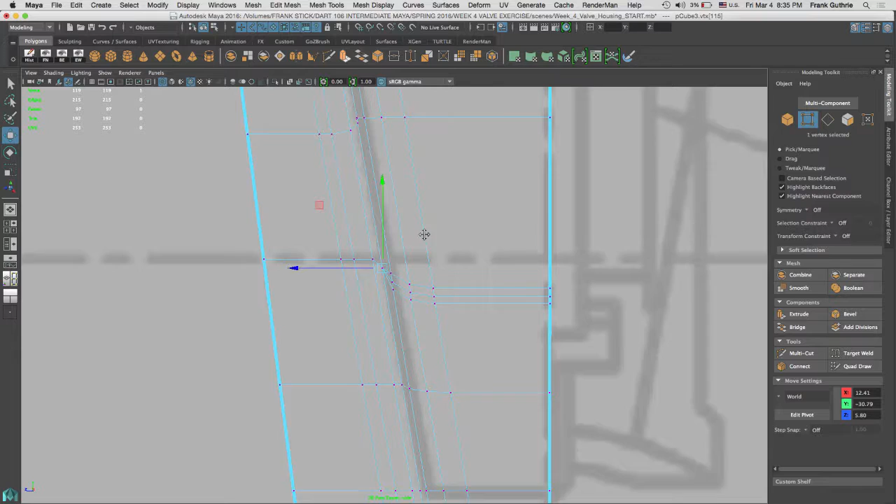Select this guy, shift select this guy and these guys, and deform lattice, right mouse button, lattice point, move, V, snap that, and then do this guy right here. Okay, and I'm going to do the same thing for the other guys. Notice that I'm leaving that lattice right there. I can have multiple lattices in one object because it's not on the object but on its components. Perfect. Now we're going to take care of the last group.

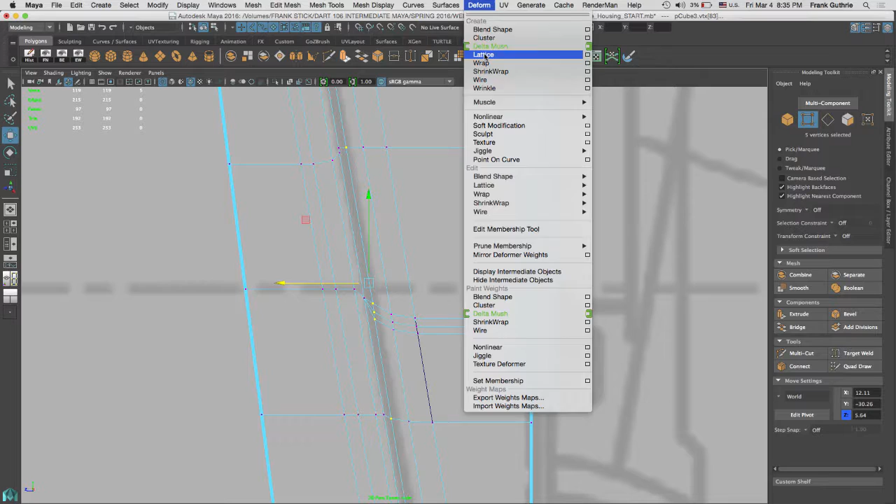So vertex and deform lattice, right mouse button, lattice points. And again, the lattice points is the component mode of the lattice. And there you have it. So notice that I have 3 lattices, right? Time to save and delete the history. So I'm going to go to object mode, delete history.

I have 2 triangles. They're really easy to fix. Just delete the middle edge right here, hit delete. And I'm going to select these edges just to be sure. Hit Q, select all these edges right here. I'm holding Shift and Control. And what I want to do is a soft edge operation, like so. So Shift, right mouse button, soft edge, harden edge, soft edge.

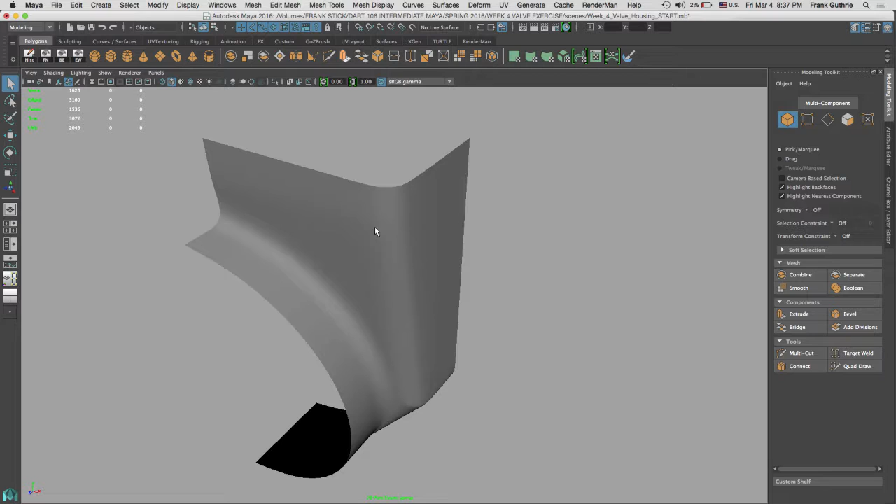And if I go to object mode and I hit 3, look at the fantastic model we made with 2 types of bevel edges, a very round bevel edge and a very sharp bevel edge, just like our image reference right here.

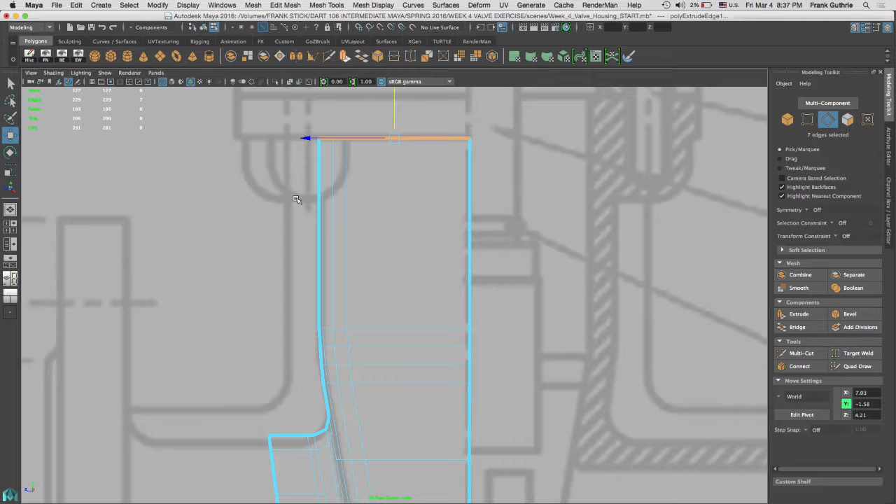And what I'm going to do next, I'm going to extrude this top edge. So select this edge, shift double click this other edge, and I'm going to go to an extrude, W for move, and I'm going to move this edge to the top. And in our next video, we are going to create these pieces right here and blend them in with the rest of our housing.

Select these edges and again create another soft edge operation. And there you have it.